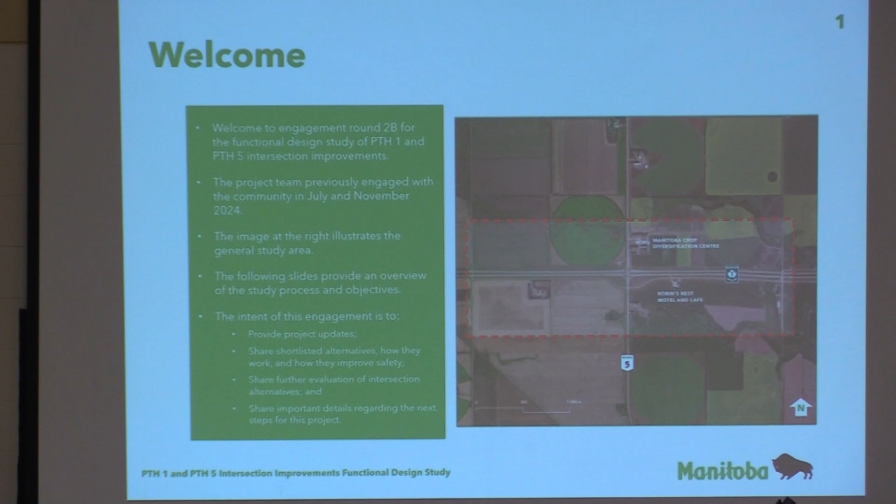Okay, that first slide just says welcome, which is everything that I mentioned already. But the bottom bullet there, the intent of this engagement is to provide project updates, to share shortlisted alternatives, as I mentioned, to share further evaluation of intersection alternatives, and then to share details of next steps. We introduce ourselves, so we'll skip this one.

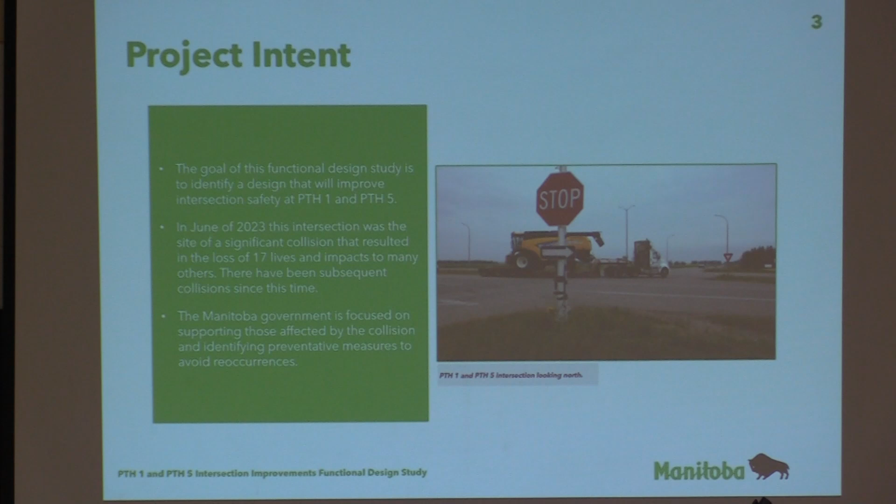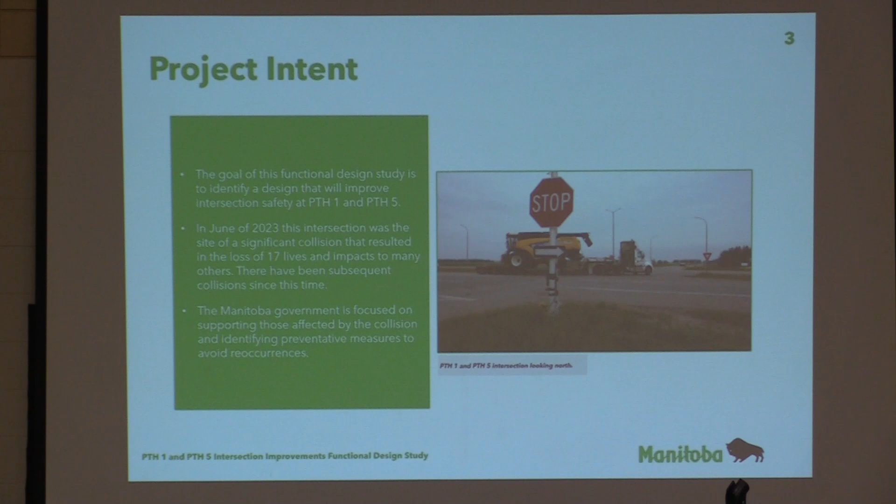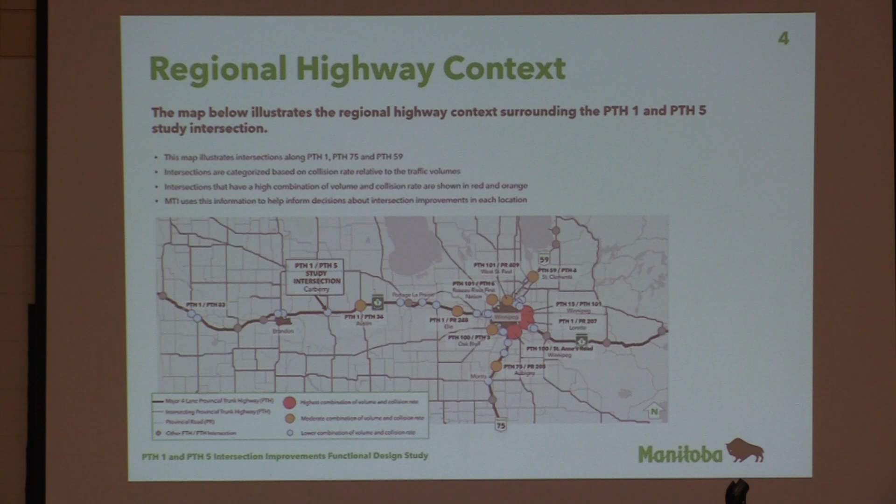This slide is helpful for understanding the location in part. So what you're seeing is southern Manitoba. It shows the PTH1 highway going from west to east or east to west across the province, and then Highway 75 as well. And what it's showing along the way is all the at-grade intersections, and the dots represent volume collision ratio. So you can see where the study section is. The largest dots represent the highest combination of volume and collision rate. The orange ones are a step down from there, and the blue ones are a step down from there, and then many of the at-grade intersections would have lower rates yet. So this isn't a commentary on how important this intersection is, just the lay of the land in terms of the PTH1 infrastructure and intersections across the province.

Round one, for those who weren't in attendance, was just to say hello - to introduce the project and receive input on what are the things that are important to people, what factors we should consider. Again, not which intersection should we do - we won't be asking for a vote about what type of intersection should be done. We need to know local things we should understand, any gaps in our understanding so we can do a better job recommending a good intersection treatment for this location.

After round one, we developed alternatives as a team. We came back - for those who weren't there in round 2A, we shared that whole range of alternatives, which we'll recap here today as well. And then we shared how we would be evaluating it.

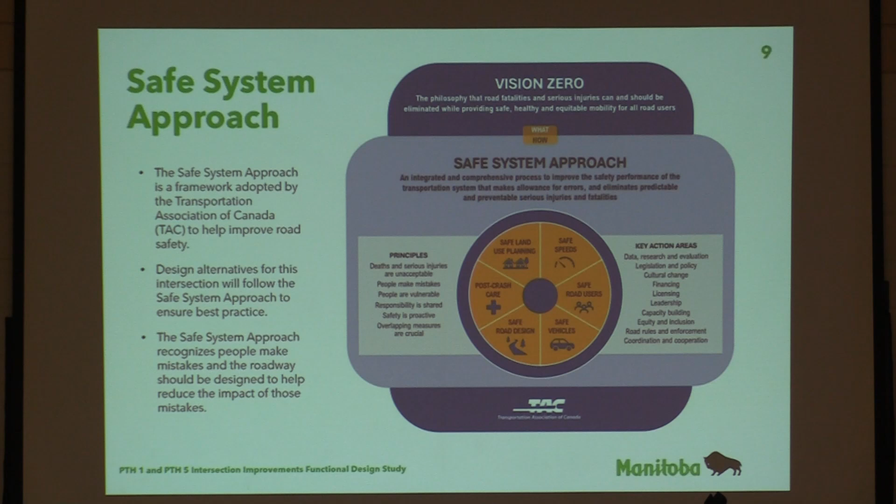Furthermore, three goals on the right: safe road designs. The goal there is designs that protect for mistakes, like I mentioned. We have to acknowledge that people make mistakes, and we try to reduce the impact of people making mistakes.

Safe speeds - the goal there is not too fast, but also not too variable, and that comes into the discussion about speed limits. Some say maybe reduce speed limits at this location, but we have to be mindful that's not always the best solution because variability is also difficult. Someone's going at one speed, someone's going at another, people aren't obeying the speed limit even if there's enforcement.

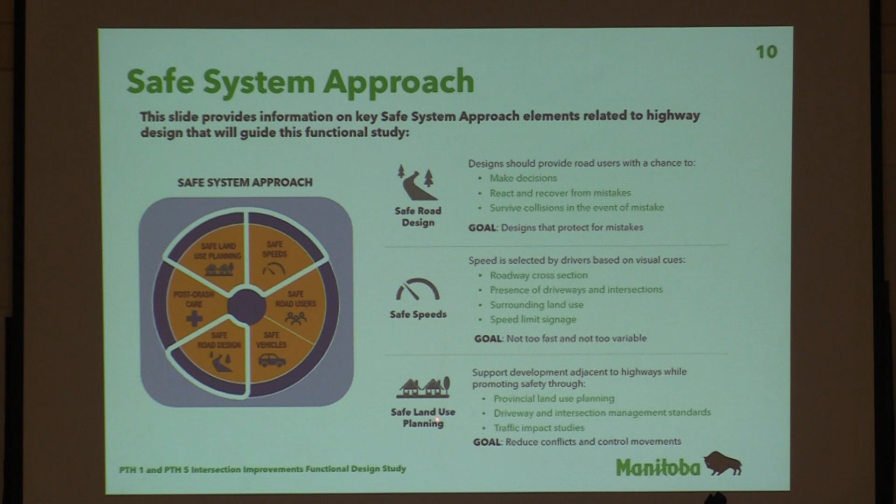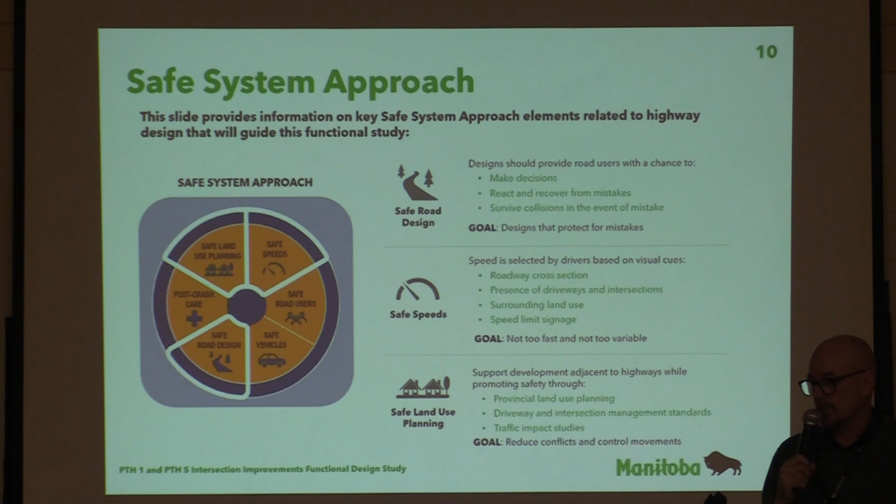So you do have a risk with having variable speeds just as much as if you lower or raise the speed limit. Safe land use planning - the goal there is to reduce conflicts and control movements. That's often about what's happening in the vicinity of the intersection, and planning that contributes to fewer negative accidents and collisions.

Especially for those who haven't been here the last couple of meetings, these might be hard to see, but this information is available on the MTI website, and you can go there and get this information. We'll give you the link, and you can zoom in and peruse it.

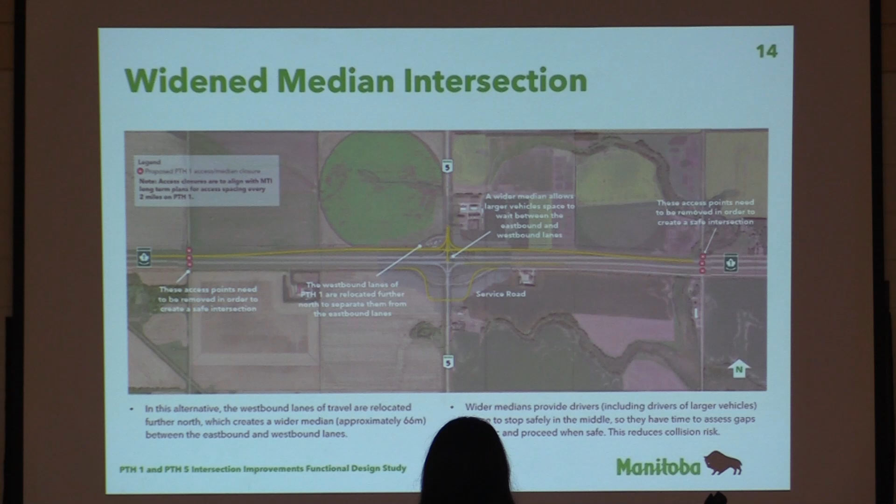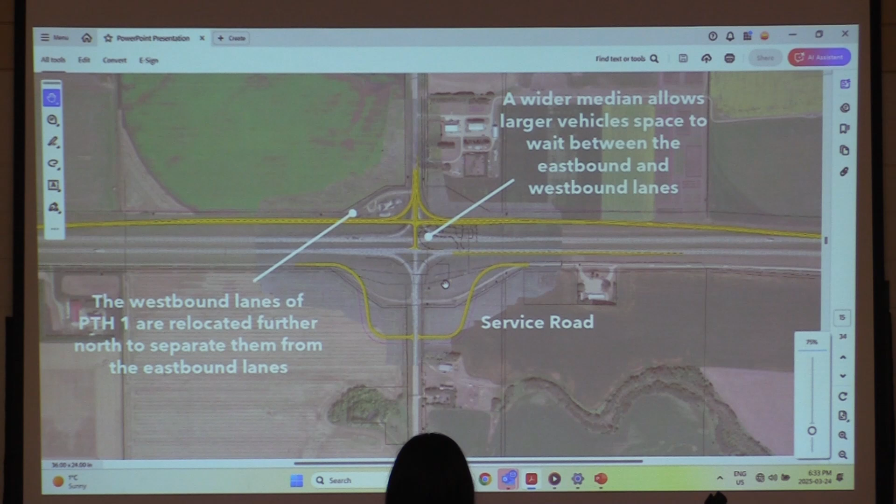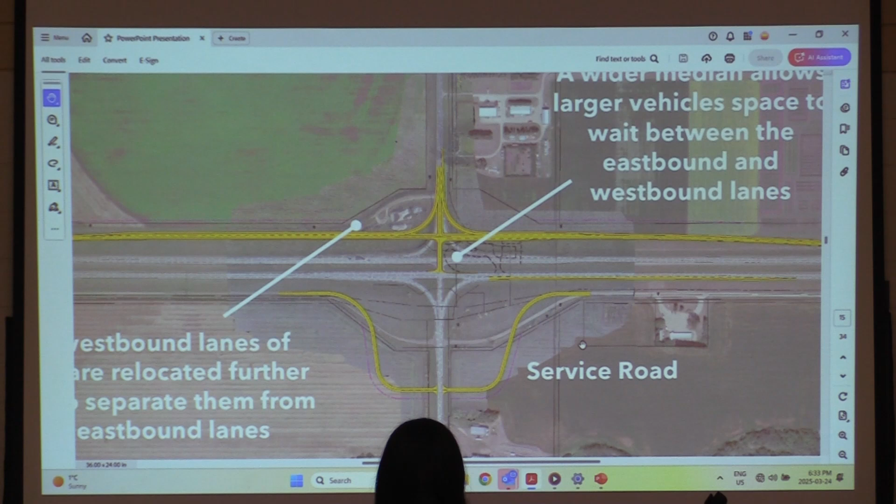With this option, the eastbound lanes stay where they are, except there's a little acceleration lane added here, so that when you're turning on PTH5, that'd be better. When you're turning off, headed north from Carberry up to PTH1, you make a right, with the acceleration lane added there. And then the westbound lanes are abandoned and instead pushed north into the fields.

What that does is it creates a widened median, hence the name widened median, between the eastbound and westbound lanes. A couple of advantages: people can feel safer when they're between the eastbound and westbound lanes, waiting across one direction or the other. Also from a driver workload perspective, currently you have to look that way and that way, and over your shoulder on the south side to make sure nobody's coming. That workload is high, and this divides it, basically cuts it in half. It means you can make one choice, proceed through, make another choice, and it reduces the chance that any driver would make an error there.

The yellow at the bottom is the service road. Every one of the shortlisted options shows that service road being adjusted - you can see it in the aerial photo. It will be pushed further south, and that creates a separation distance. For those familiar with these movements, if you're on PTH1 coming into Carberry and turn right or south, immediately upon you is that service road intersection, very, very close. We see lots of close calls and collisions because of that proximity, so this would help by pushing it further south. Of course, speaking with the landowners and homeowners nearby about the impacts to them, every proposal shows this service road adjustment.

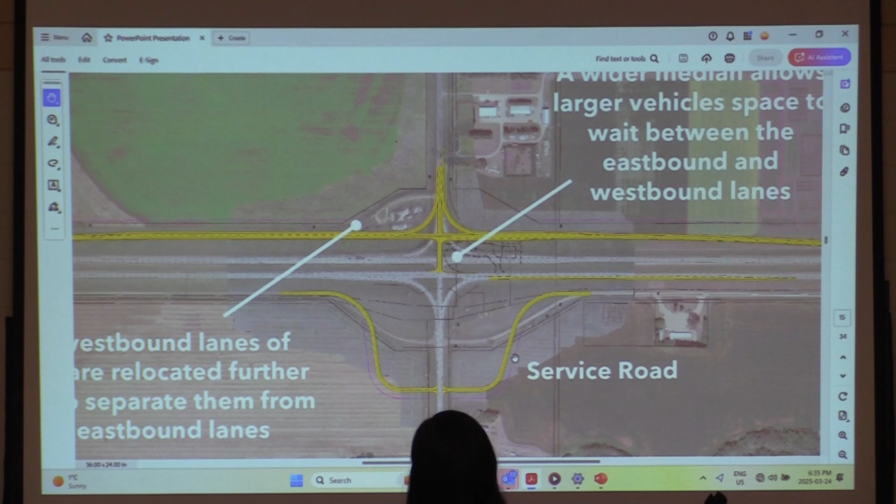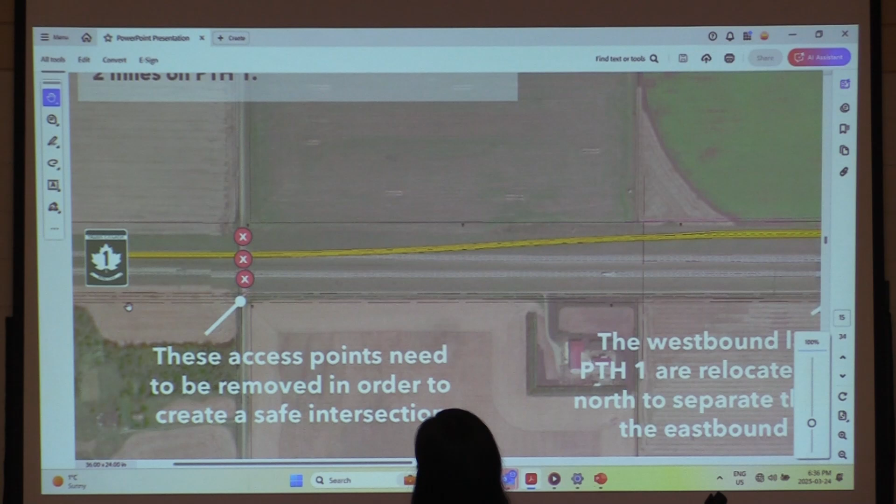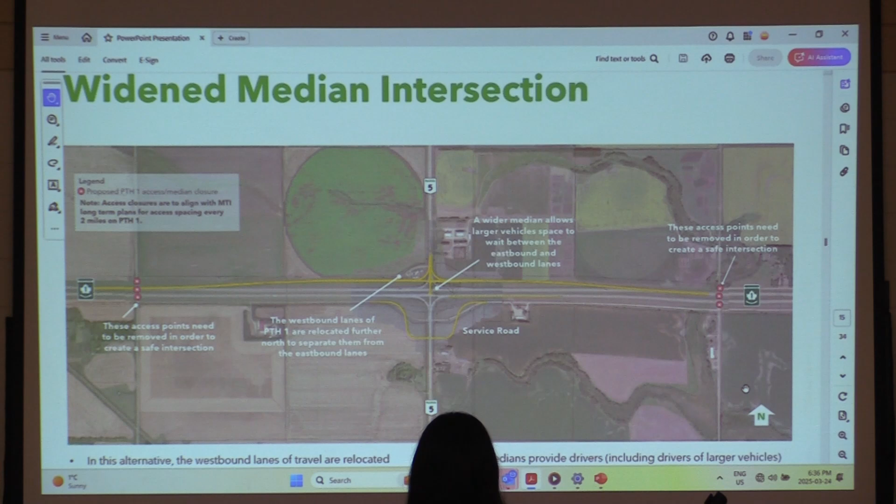Furthermore, all of them show those three X's to the west and to the east, which I mentioned earlier. In an ideal situation, from a PTH1 safety perspective, the idea is if you create a safer intersection, you try to get people to go through that one rather than one that's not safe. That said, clearly in this area - this goes to the point that every intersection and every area is different - the movement of farm vehicles and agricultural operations will be quite impacted by that. So we have to look further at whether that can actually be done, either the east or the west. But all three, so that we're transparent, show that. We would not be transparent if we weren't showing that and letting you know we have to look at it. From an ideal safety and engineering point of view, you'd go with those, but in a local situation, realizing the impact, we have to think about how that can be resolved and whether it can be done or not.

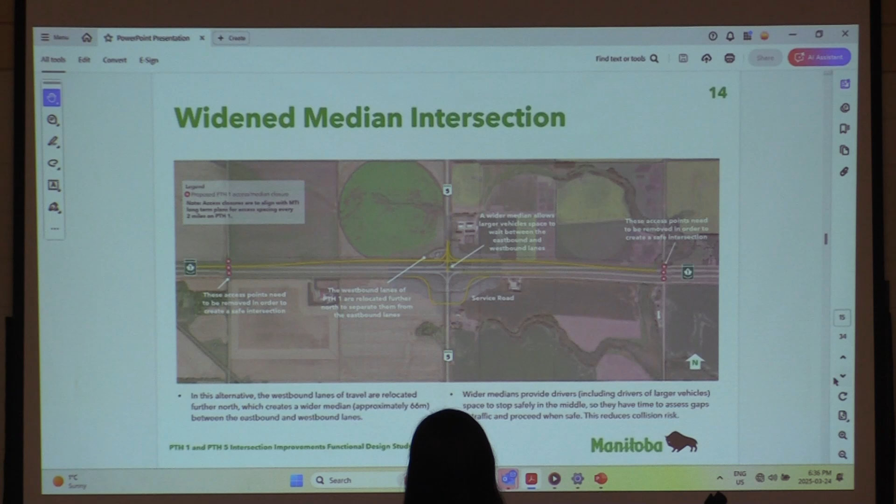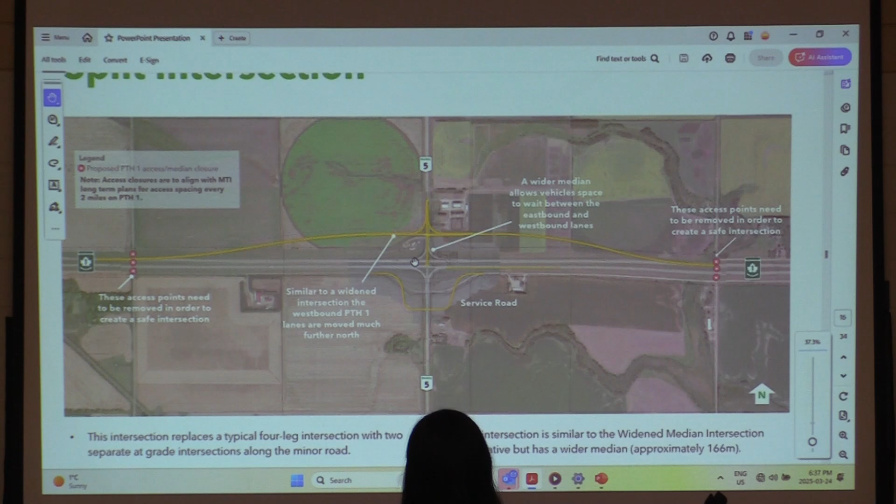Next one is a split intersection. This is very, very similar - it may look very similar to the widened median we just looked at. It's basically the same idea, except that you push the westbound lanes further north. What you actually get is not just a wide median, but they call it split because they're so far apart that, again, driver workload is reduced by allowing the driver to look in one direction at one time to cross PTH1 and PTH5.

Also you get a bigger refuge between the eastbound and westbound lanes for several vehicles parking there rather than just one car, so it really is an advantage in that respect. Of course, a major disadvantage would be the use of agricultural land and the acquisition of land, which can be very disruptive. Remember the chart about 15 to 20 other things to consider, whether they're better or worse than any of the other options.

So again, I just encourage people—I know when you look at an option, and I do it too, you say right away, I hate that one, or I hate that one. Really try to be as level-headed and objective as you can about the relative advantages and disadvantages of each one. We don't have the luxury of just telling the decision maker, just do this one because we think it's better. We have to go through all of them open-mindedly, and I encourage everyone to join us in that effort.

My impression was that when you're headed north on Highway 5 and you're going to cross the Trans-Canada, say I want to go to Winnipeg, I'd have to take that service road to get back out on the highway. No, you're going to go to the stop sign just as it is now and use that merging lane to go east. So not the stop sign, you merge. With the addition of this acceleration lane, you have a protected lane to speed up in, so that part's not changing. The service road then is just for Robin's Nest. Okay, that clarifies it, thanks.

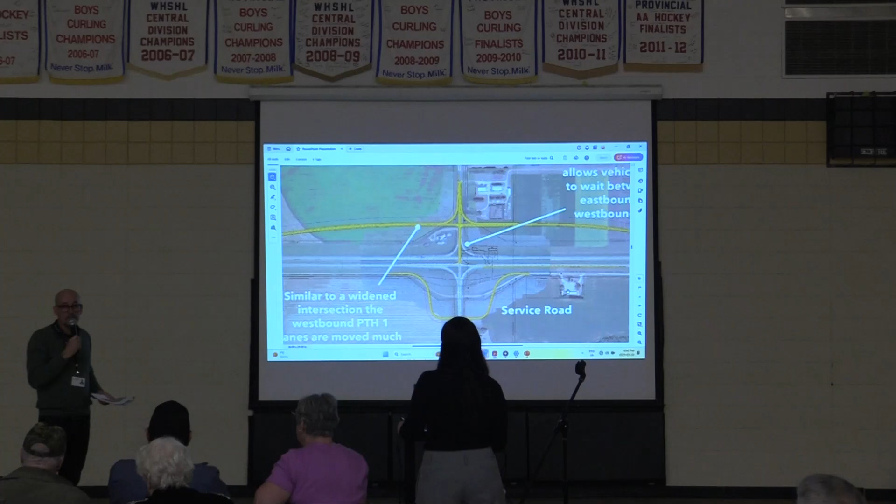Yes sir, how's the actual reason why we're all here—any of these, I know you can't compare, will it reduce what actually happens if we're still coming to a stop line meeting traffic that's going across? So you probably can hear the question: do any of these, based on your analysis of collisions, will it actually make it safer? And it will, and I've got some info to help describe that. But I encourage everyone to keep an open mind. This is an opportunity to see the information, judge for yourself, but let's wait till you see the information.

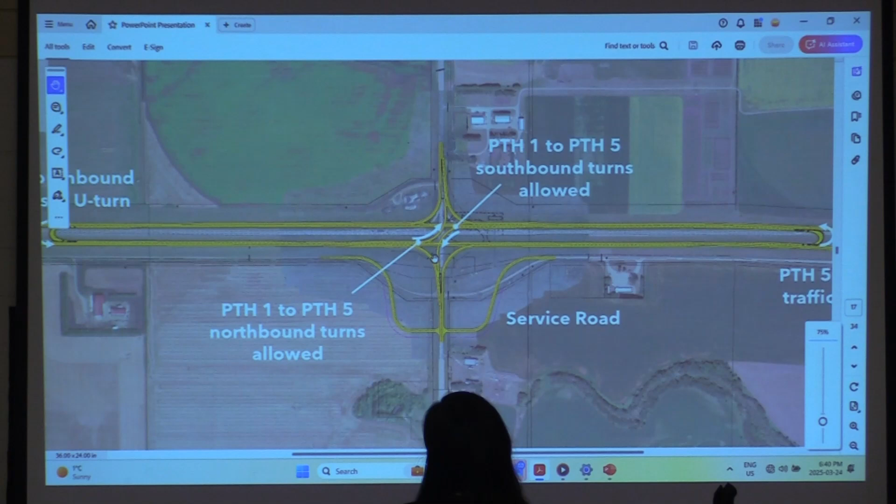Okay, the R-cut, for the reduced conflict U-turn—yes, it's new, and we'll take some time because, I'll just say this now in the presentation, there's a fair bit of additional information on the R-cut because it's new, and we need to explain it so that it gets a fair shake in the evaluation. So it may look like we're picking the R-cut, but we have not selected a preferred alternative—it's just the extra information so that everyone can understand. And I'll tell you, when we work on these projects, and we've got some members of the project team here, all of the project team has advice on what they think should be done. And for sure, there's some who feel that R-cut is appropriate, but we're not in a position to say that's the preferred alternative.

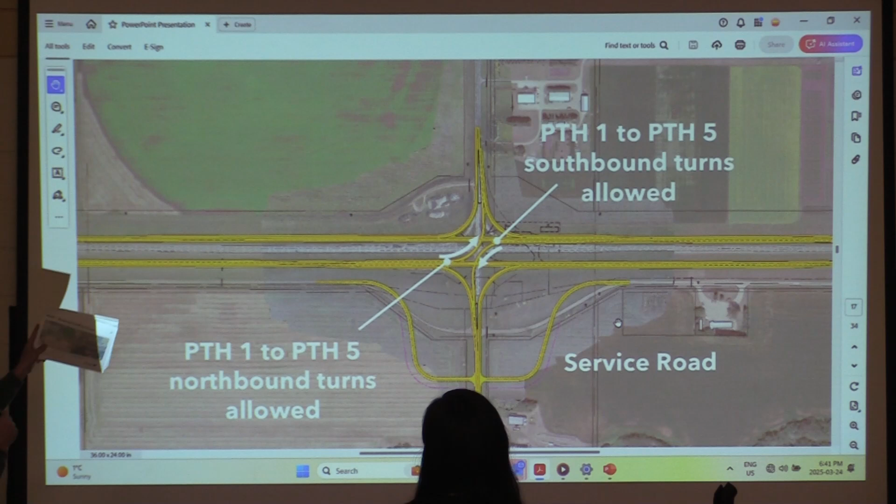So the way it works first, the big thing is considering what you can do on PTH1 versus what you can do on PTH5. If you're on Highway 1 going east to west, you get free movement—remember, that was one of the things, you want to have free movement on PTH1, so you do in this area. You also have the ability to turn off PTH1: if you're going eastbound, you can turn northbound—that's what that first arrow is. If you're going westbound, you can go southbound. So you have freedom of movement on and off.

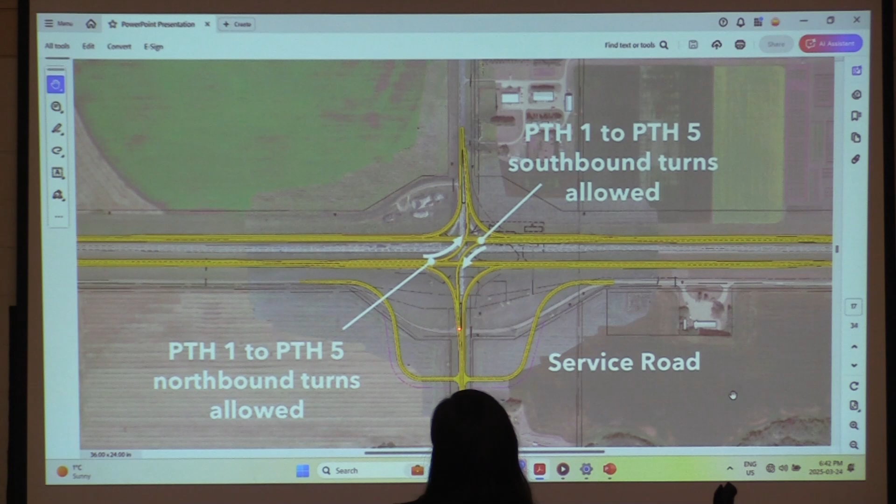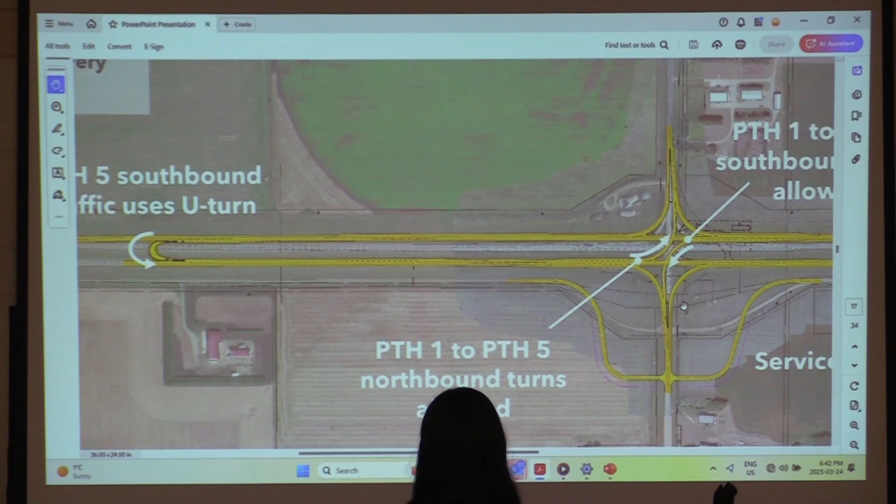What's substantially different, and maybe obvious to you, is if you're on PTH5 and you want to go straight through—again, the nature of this design in many instances is that movement going straight through, you can't. So what the R-cut does to make things safer: if you're going on PTH5 to the south and you want to continue to the north, you need to merge onto PTH1, and it goes off the drawing here, but some distance away you do a U-turn, and then you come back and can continue to Brandon or north on PTH5. The same is true if you're coming south—you go to the U-turn to the west, then come back and turn to Carberry. We've got some data on travel times and how much extra time each of these intersections will take, or how much quicker a lot of the movements actually are, for each of those options, and we'll share that in a moment. So that's how it works.

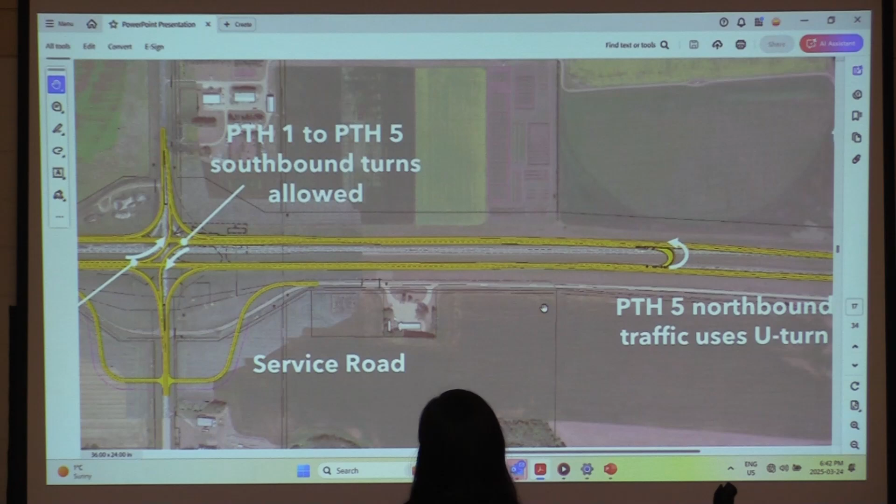You can see the service road again, the median closures again, subject to the things I said—like I said, third or fourth time, but we do need to have a closer look at those median closures that are shown.

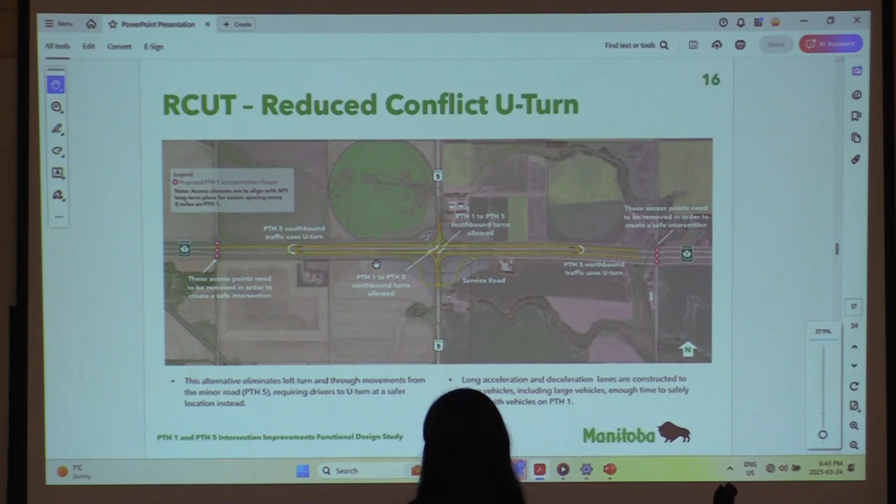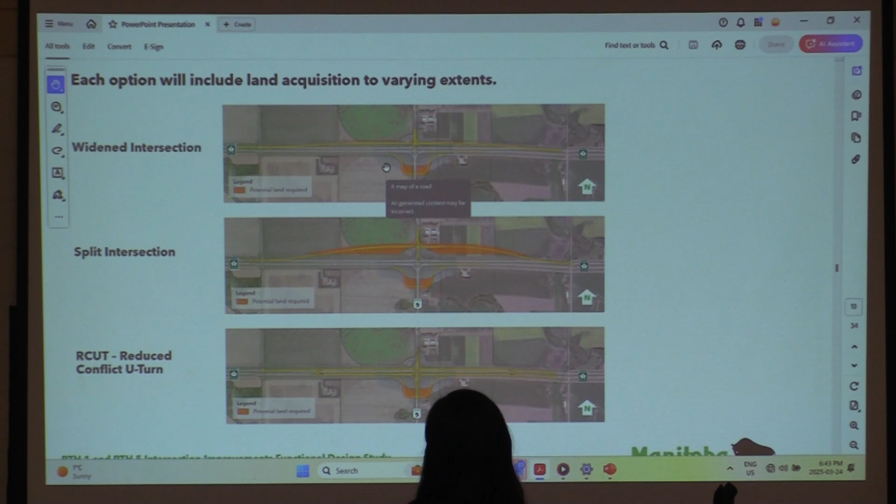Clearly, what are all the locations? You can see on the service road in every case two blotches of orange that need to be acquired in order to do those service roads. In the first case, this is the widening, two slivers of land on the east side and the west side of PTH5, north of PTH1.

In terms of the split, this of course has the biggest impact on property. If this were the one chosen, it would require all that land in order to accommodate the split. The other option has the same service road as noted already, plus a very small sliver of land on the north side, so small it's measured in meters.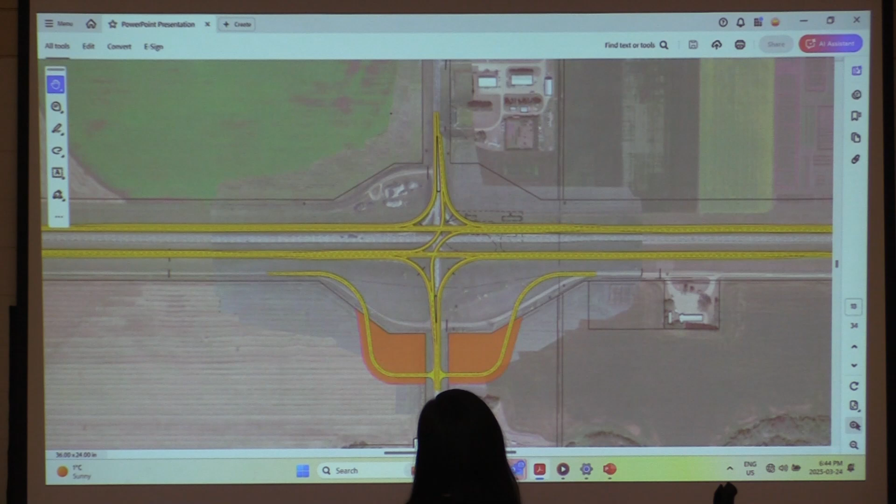Okay, to the question of safety. There's a few slides on safety. That slide shows the gentleman's question about whether B-trains can fit in while making that turn. This slide shows some B-trains and how that would have to be designed in order to make it work. But we can talk about that.

Okay, conflict points. Conflict points are important for understanding safety. It's one of the ways of understanding safety for intersection analysis. In that first bullet, we indicate the study reviews numerous kinds of conflicts. These include three kinds: merging conflicts, diverging conflicts, and crossing conflicts. Each of those predicts different injury rates depending on the type of conflict, so not every conflict is the same.

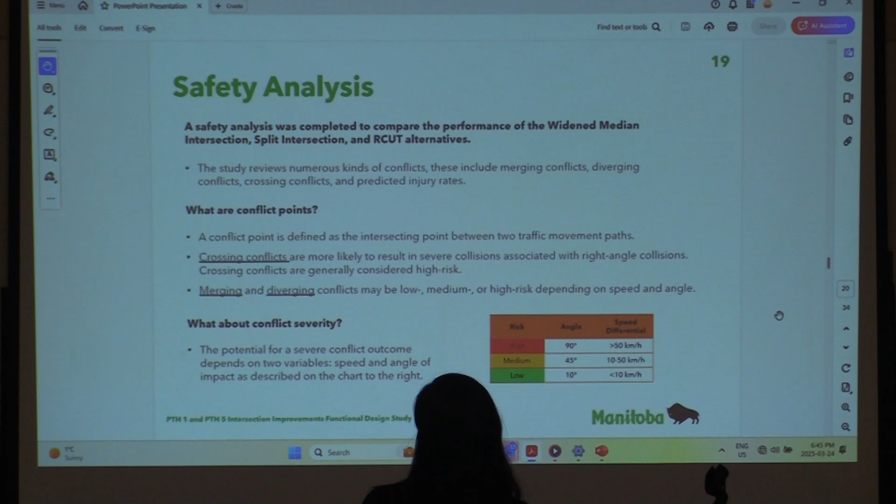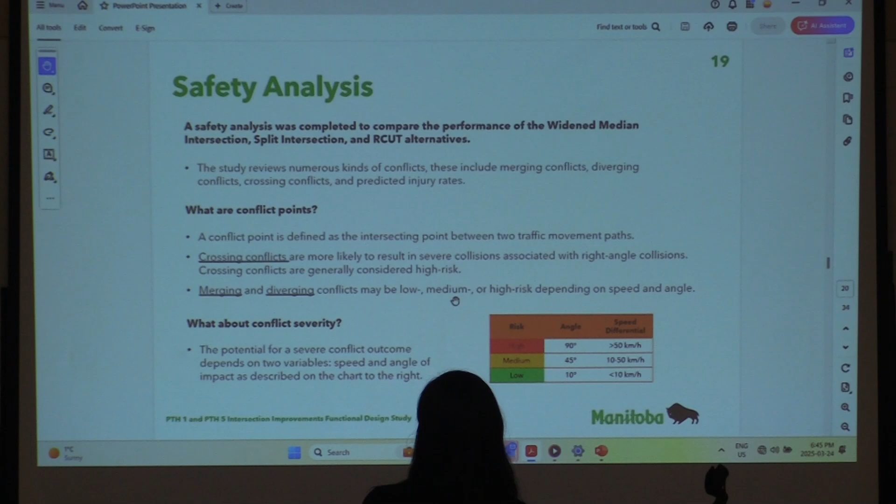For crossing conflicts, these are more likely to result in severe collisions associated with right angles. A right-angle collision is the most severe type other than a head-on collision, so those are considered high risk. Merging and diverging conflicts could be low, medium, or high risk depending on speed and angle. That's the chart at the bottom right. High risk is a 90-degree angle collision with high speed differential greater than 50 km/h. Medium is a 45-degree collision, 10 to 50 km/h. Low is 10 degrees at less than 10 km/h.

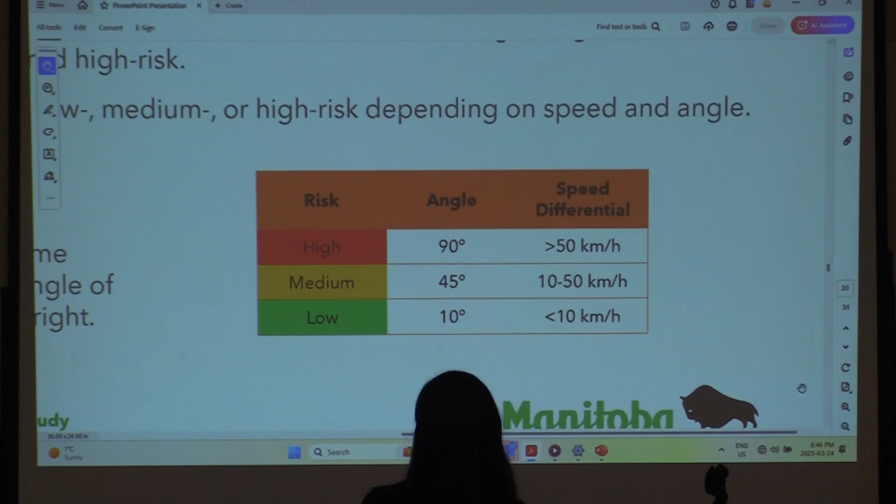So that's one piece of understanding safety, which is explained in the graphic on the next slide. These are very important slides. Afterwards, we're going to put the options up on the tables at the back. If you want to stick around and talk to us, we'll have some of these slides on safety there as well.

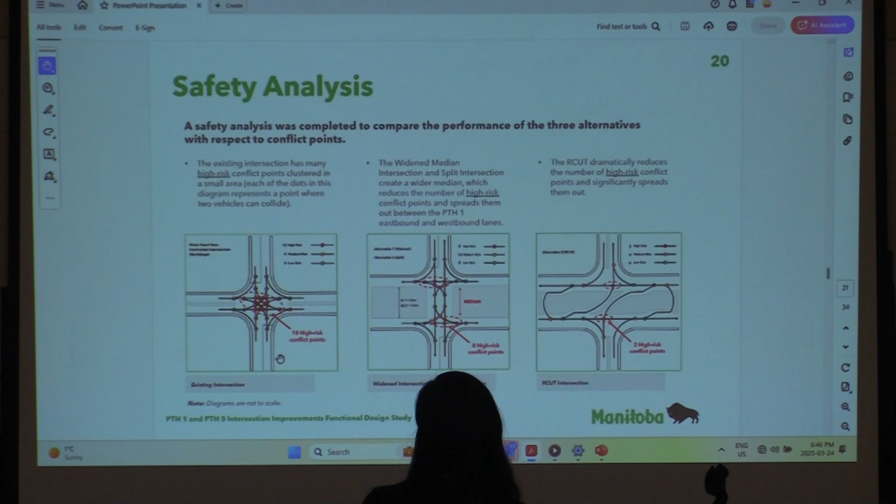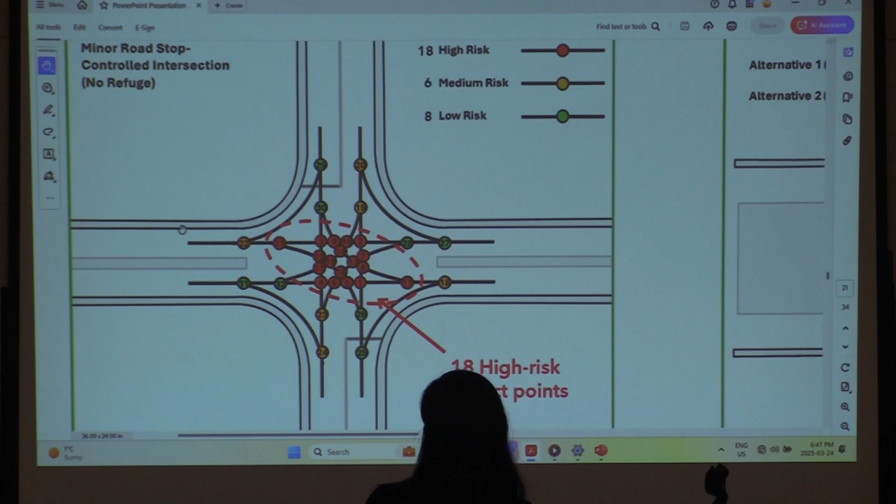On the left here, that's the existing intersection, a typical 90-degree cross intersection. This is just the geometry, so you can see the lines, one for every car movement. If you imagine going in any direction and making a turn, all those options are shown. Every time a line crosses another line, it's a potential conflict. So these are just geometry.

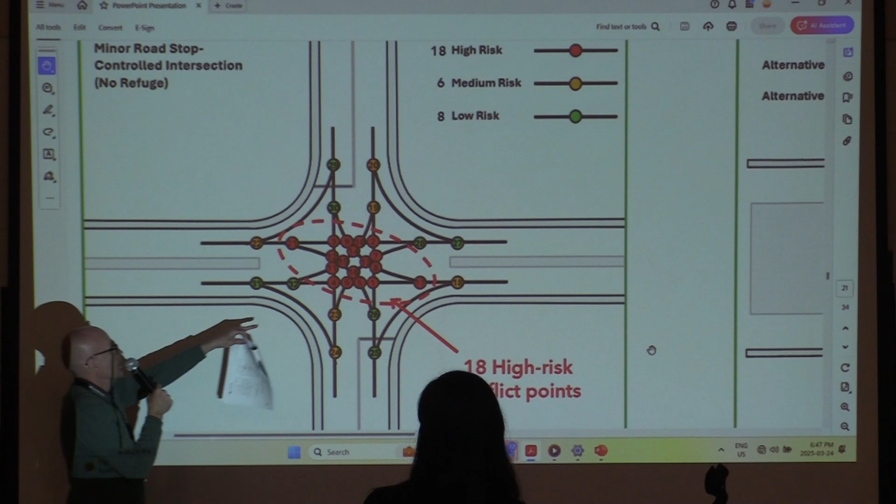These are all conflict points: green, yellow, and red. The red ones are the high-risk ones, where the angle and speed combine. In the current situation, there are 18 high-risk conflict points: 16 of them are the 90-degree type, and 2 are the merging/diverging type. Did I say that right? Yeah, thank you—not the engineer, just the one explaining it.

Yes, sir, go ahead. You talk about all these things, but you don't talk about lights—the same kind of light sensor that you have on 16 and 1. It's worked for years and years. Why can't it work on 5 and 1? Okay, so we did talk about signals at some point, and the disadvantages. I'm going to go through the presentation and we can talk about why signals weren't shortlisted. I just want to know why—it doesn't deal with safety, why that's needed.

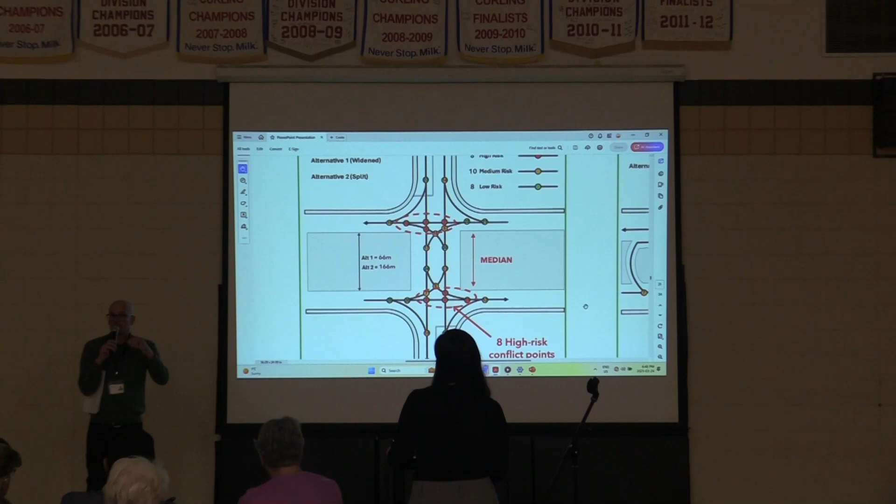Okay, the next one actually represents both the widen and the split. They're essentially the same configuration, just remember the split is further. They both create a wide median, but you have the same patterns, so this graph suits both the wide and the split.

You can see what's happened is the number of high-risk conflict points has been reduced to 4 here and 4 here, so from 18 to 8. So it is effective in safety, just starting there from a logic point of view and an analysis point of view. If you were asked how are you going to manage safety, how are you going to characterize safety?

You start looking in terms of those conflict points, reducing those conflict points, and reducing driver probabilities. Many ways to make something safer, as opposed to speculation about whether we think something is safer. We have to analyze it and prove it.

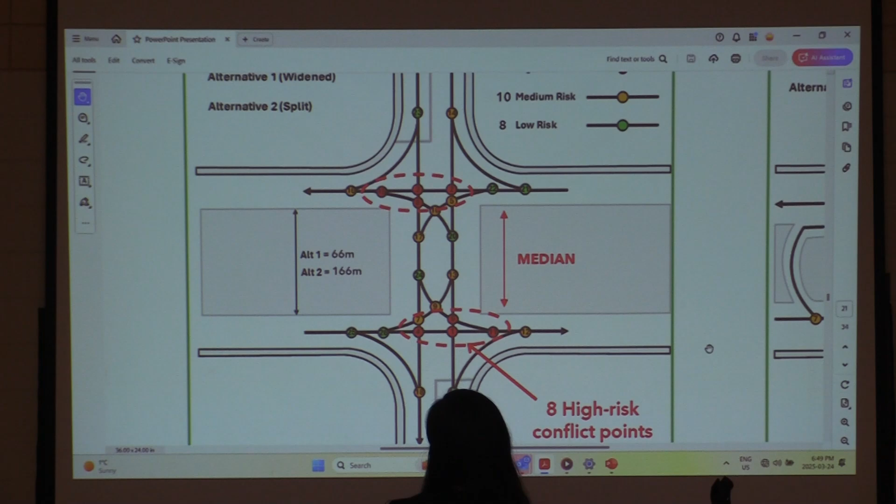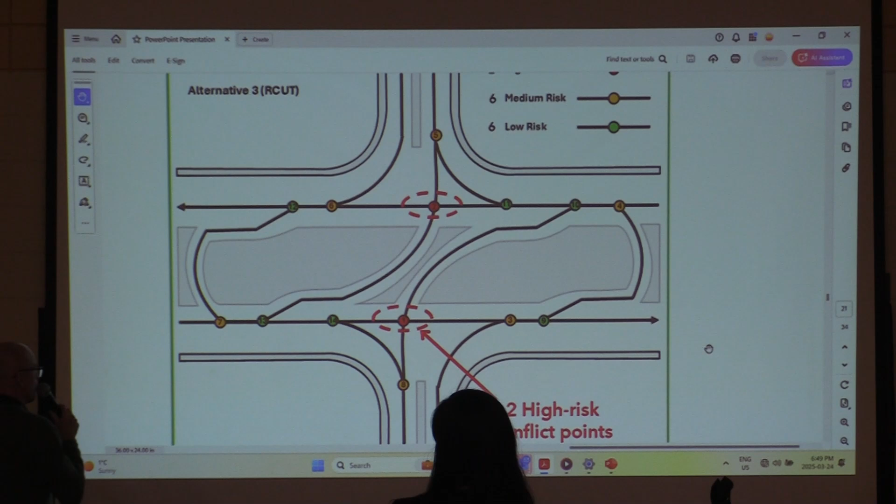Last one is the RCUT, and from a safety evaluation perspective, it outperforms the other two quite substantially. And again, just the geometry here, it wasn't magic. It reduces the high risk conflict points to just 2, and that's why it's seen as safer than the other two, where it channelizes the driver's movements, reduces the driver's workload thereby, and also creates only one high risk conflict.

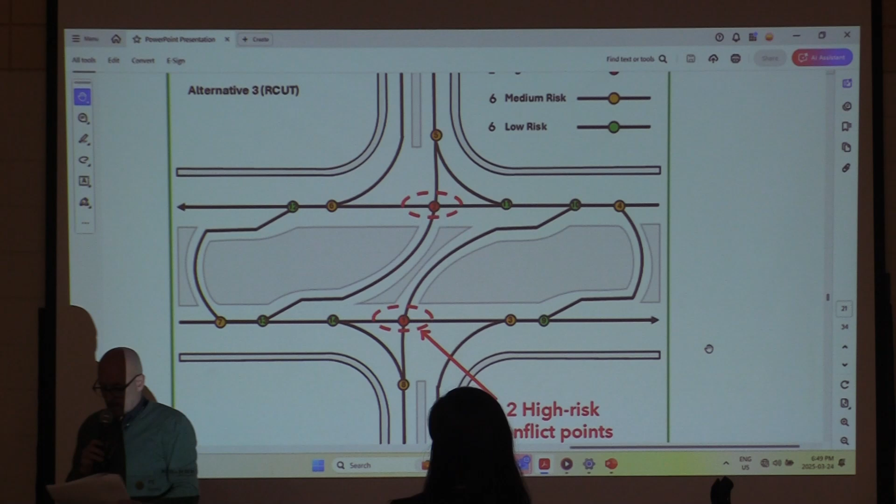So if you went to RCUT, well then how is the speed going to reduce? Is it going to be 100 or 110? So speed limits, there you want to talk about speed limits. The question was, in any of these options, would the study be recommending any speed limit changes? Is it possible there's recommended speed limit changes?

So certainly, as you can imagine, speed is a major factor in any kind of incident or collision. And of course, a lot of people logically think reducing speed makes things safer. However, as drivers, as yourselves, everybody likely drives here in the room, as you drive in certain situations, you tend to have a feel for how the road operates and how it feels for you. If you feel safe going a certain speed, or if you feel more confined, you don't feel as safe, so you tend to slow down.

So the way highways operate in Manitoba for the most part is they're wide open, there's not a lot of visual cues for why a person would need to slow down and that sort of thing. So drivers tend to drive to an operating speed that feels safe to them, and the speed limits are set based upon design standards and that operating speed that drivers tend to operate.

So it's a little bit of an art and a little bit of a science, because if you do look at any of these options, you know, if you put up an 80, you'll have some people that will 100% obey the law-abiding citizens, but you will certainly have individuals that will not abide by that. So you can have a speed differential of between 80 and 110, 120. So now you've got a 40 kilometer an hour speed differential.

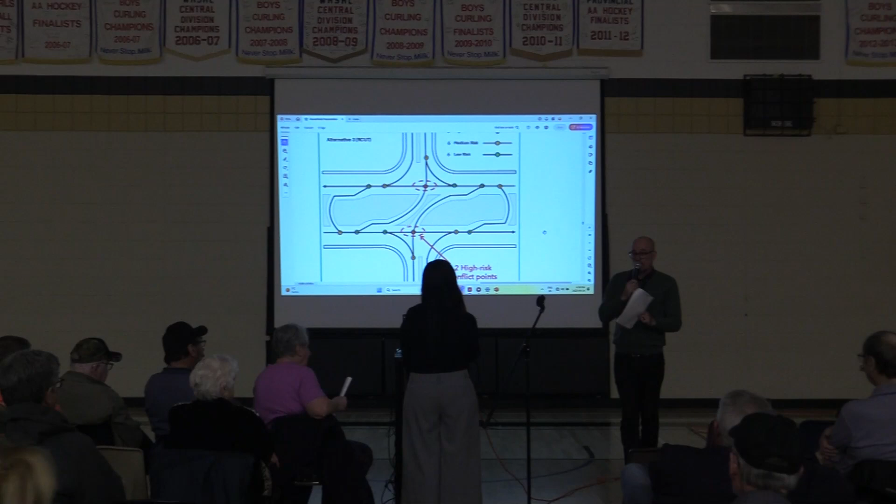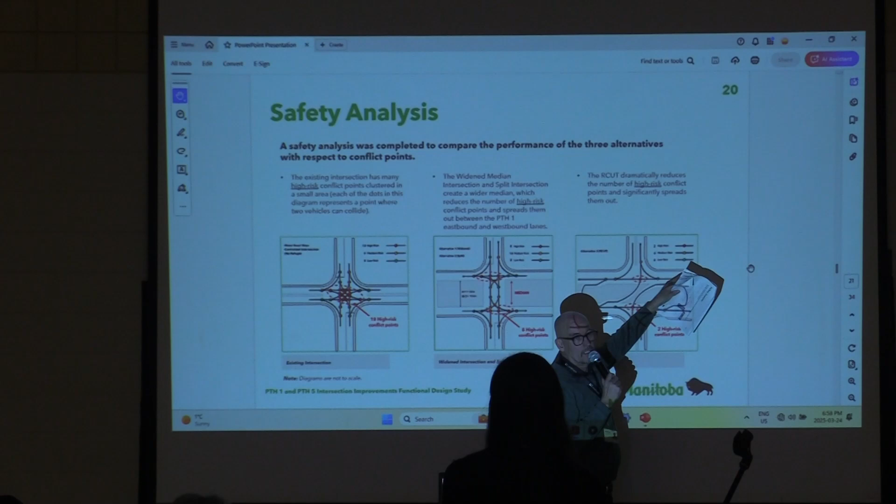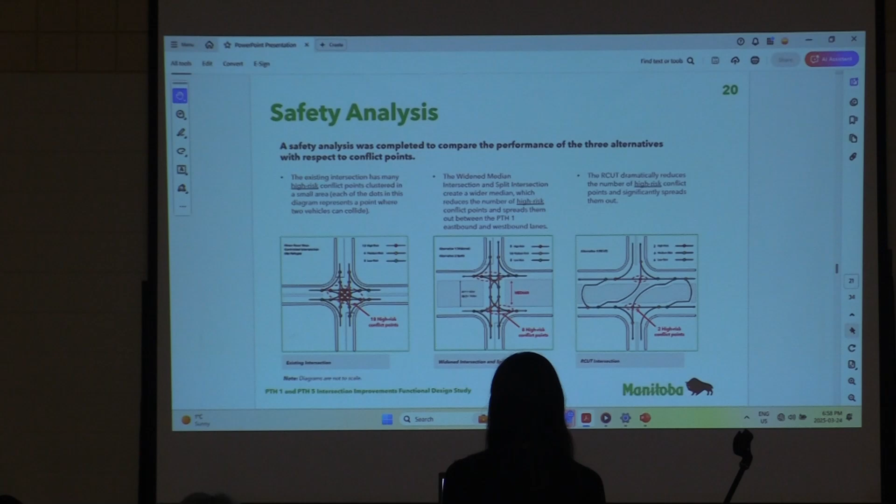Question, sorry. For the numbers, then wouldn't you add another 12? Because you're shoulder checking and merging essentially 6 times per lane. So Diana, would you add like 6? Not 12, so you merge once, but if you're doing it with... Yeah, I got it, 6 green ones, would you? Yellow.

So the gentleman's asking, and it's a great question, thank you. Because of that merging situation with the RCUT, especially if you're going off to go to PTH 5, you might merge all the way over. In one direction you have to merge across 3 lanes, and then in the other direction the same thing. So he's asking, would you add dots to the count of potential conflict points because you have to make those movements?

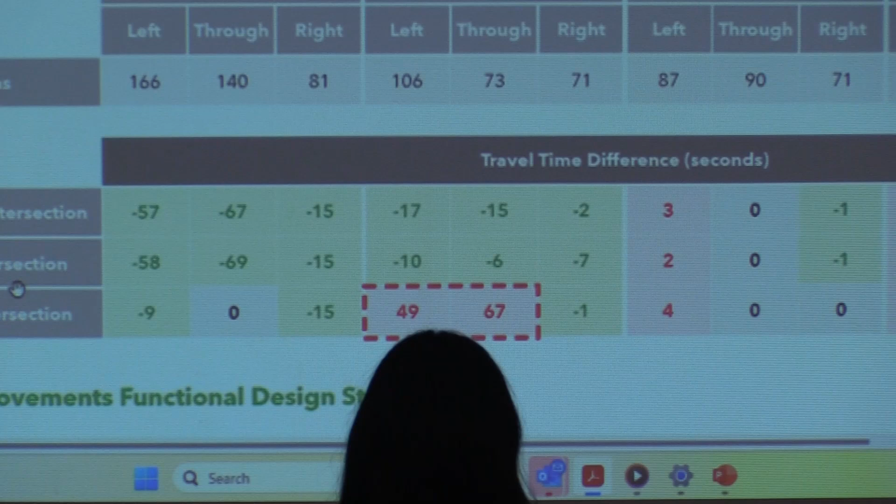So this is showing that in the case of the RCUT, for the northbound direction, considering the travel times in the existing condition and existing intersection configuration, they result in just slight decreases, or more or less the same time to travel through the intersection, whether the northbound lane is left or through.

But in the southbound direction, because it's basically not as busy as the northbound direction, the travel times are lower certainly, and when you look at the RCUT and have to go through U-turns, you see an increase there. I hope that explains that.

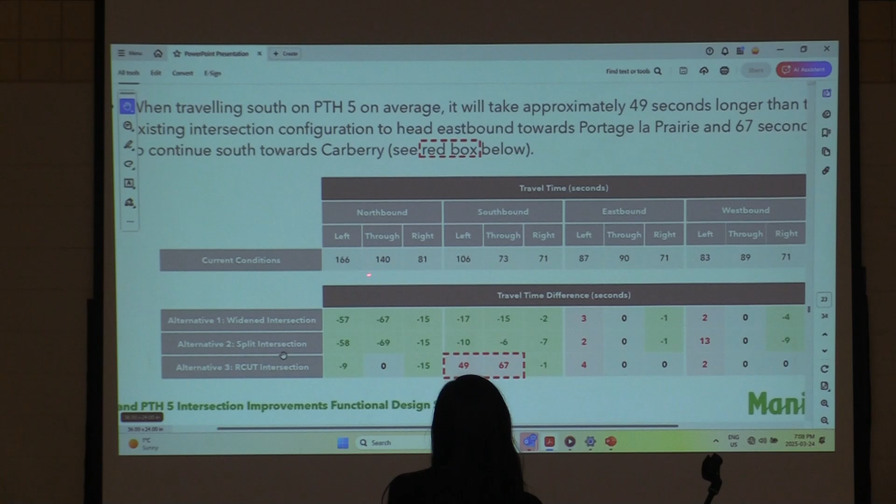Okay, yeah, I don't understand how it can be zero for northbound through, when you have to merge onto northbound. So northbound through here for the RCUT, why there's no difference, is because of waiting time, you don't have to wait. It is interesting, well, you do have to merge on, which is different than waiting, so you merge and also wait for the stop sign.

When you yield, often you just get to keep going. You have to slow, but you don't stop. Whereas a full stop sign or crosswalk, you have to stop. So the logic holds there.

Go ahead. I noticed you got all these wait times and everything else. Are you talking about wintertime? Is this the wait times on average throughout the year, or a particular season? Can you just tell me? It's looking at the peak hour, and it's typical through the years.

So would it depend on the conditions of the road? Yeah, like, you know, when you do an average, right? Yes, of course, you're right. Conditions would mean you go slower for sure, and not in all intersections obviously. Yeah.

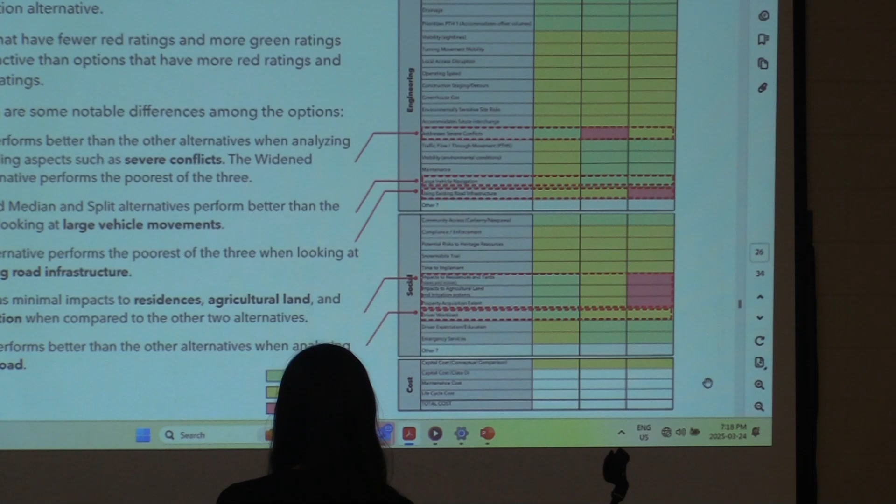Okay, and then at the bottom, costs - they're going to be comparable. Comparable means typically within a contingency. So if you have a contract, there's always a contingency, and it's 10 to 30%. The cost is within that amount, and they're comparable because of that contingency - so they're not taking your 100 million down to 3 million, somewhere in between. And that's how we think about it.

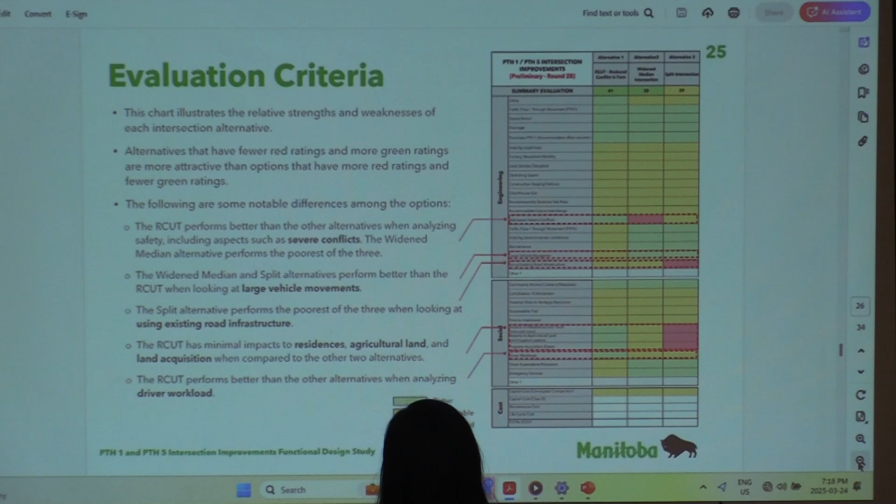So as I said, we don't have the luxury of picking on one factor. We have to look at all the factors, particularly safety, and everything else is important as well. In the end, we want to pick the one that has the least disadvantages and the most advantages, in particular the critical ones.

Okay, I mentioned this before and I'll mention it again - the RCUT is not selected. Even when we look at it, some of us want to pick the RCUT, and some don't. So we are trying to remain objective about which one to pick. Since it's new, we want to provide some extra material here to help explain it, which also helps explain the widening and split intersection.

It's a great province, it's winter - our neighbors in Saskatchewan deal with a similar situation to Manitoba. So this is one that exists in Saskatchewan. These are actual photos.

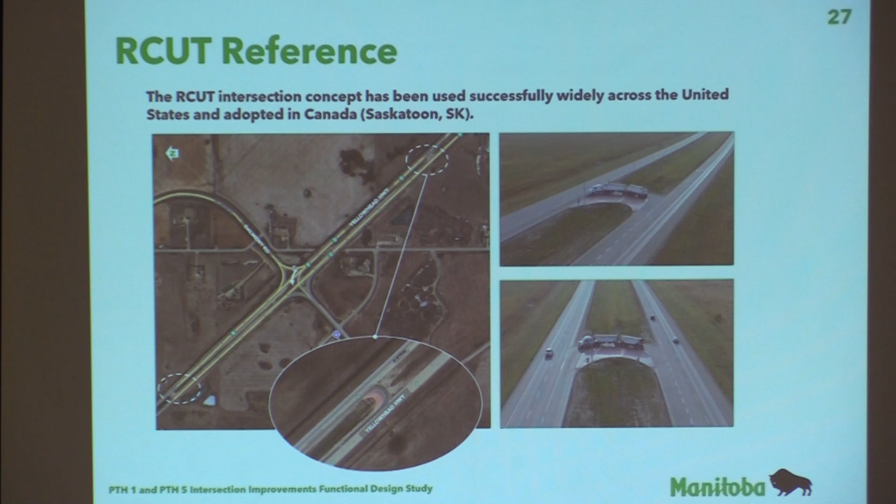So we're not going to rely solely on this option. Keep in mind, even if you don't like the option, it is an option.

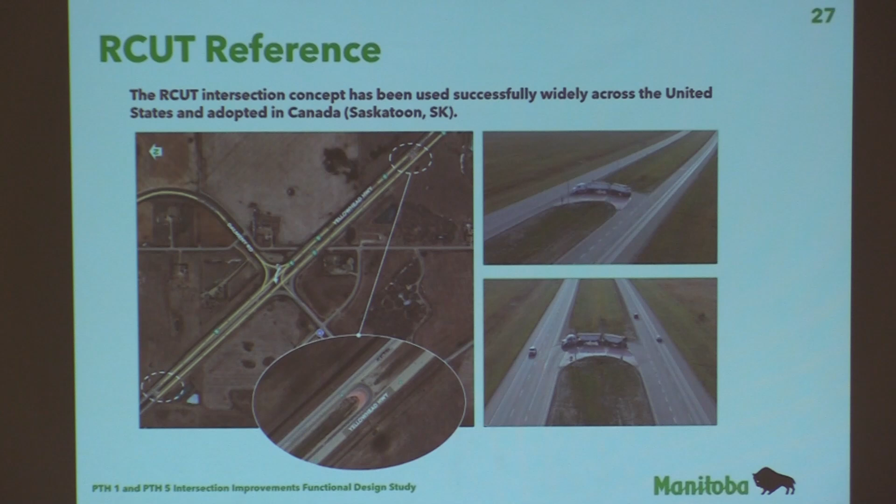There were, oh yeah, okay, if you're in... great. Whereabouts is that, Larry? Whereabouts is this?

It's just west of Saskatoon on Highway 16, Yellowhead. When they implemented it, they designed it based on a 110 design speed for posted 100. But under abundance of caution, they've posted it at 80 to 100, and they're evaluating it while it operates, then deciding whether to maintain that or raise it.

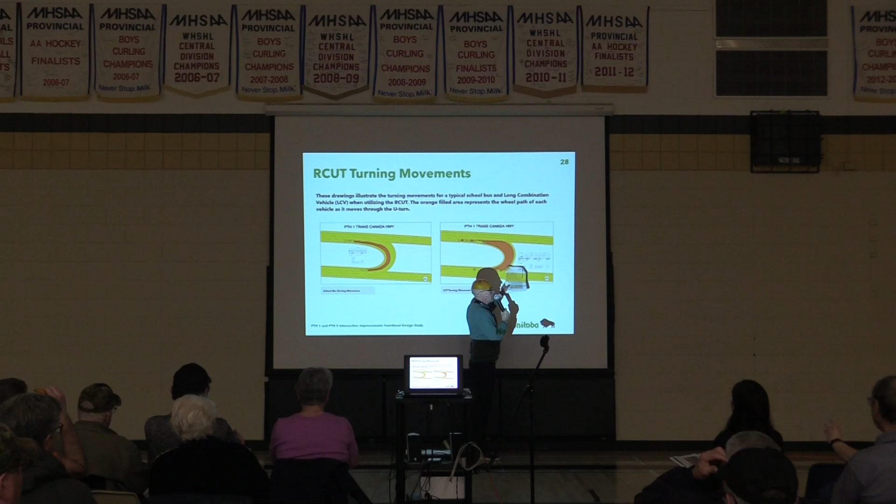This is software, which you see the reality version in Saskatoon. This is the normal software called AutoTURN. You put the trailer in there, and it shows you the orange is the wheel path, showing the outer extent of all wheels in its totality. So it's designed to make it work, even with the longer trailer.

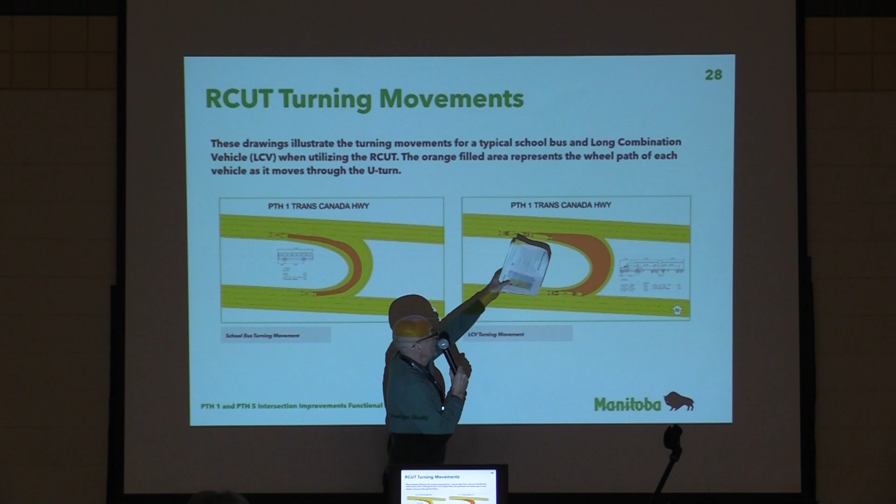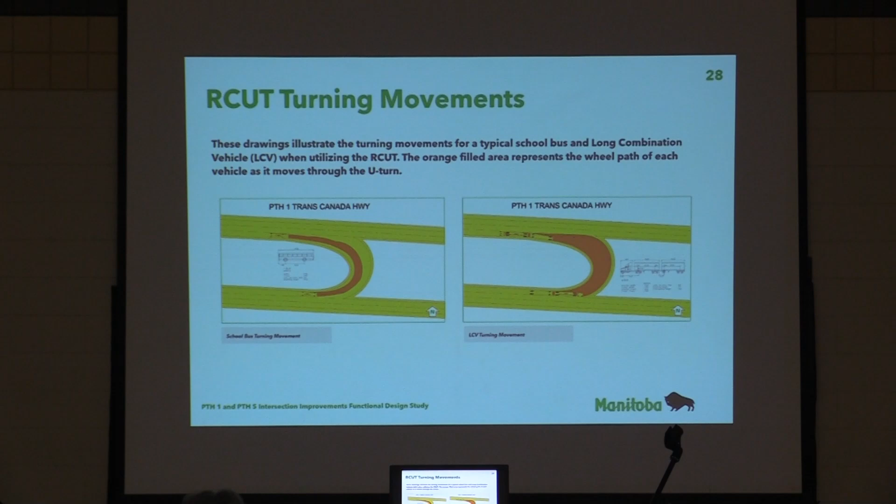I'll show you a video. No, that's the protected lane. Because there's not enough room for me to get in behind him, so I'm stopped on the Trans-Canada. That would be the deceleration lane, so that's not a through lane there, that's the deceleration lane. So at that point, the Trans-Canada is 3 lanes wide: there are 2 through lanes and a deceleration lane to do the U-turn.

See this white wheel path, that's a lane. That's a lane, and that's a deceleration. Well, the video shows this. Those intersections, is there really... like there's a lot of truck traffic on 5. Other intersections might not have as much truck traffic. Is that? I mean, yeah, like number 1 here and number 5, both of them have truck traffic?

Yes, we have done traffic counts and looked at the truck volumes, particularly size of the trucks, and also the acceleration rates of the trucks when doing the traffic analysis.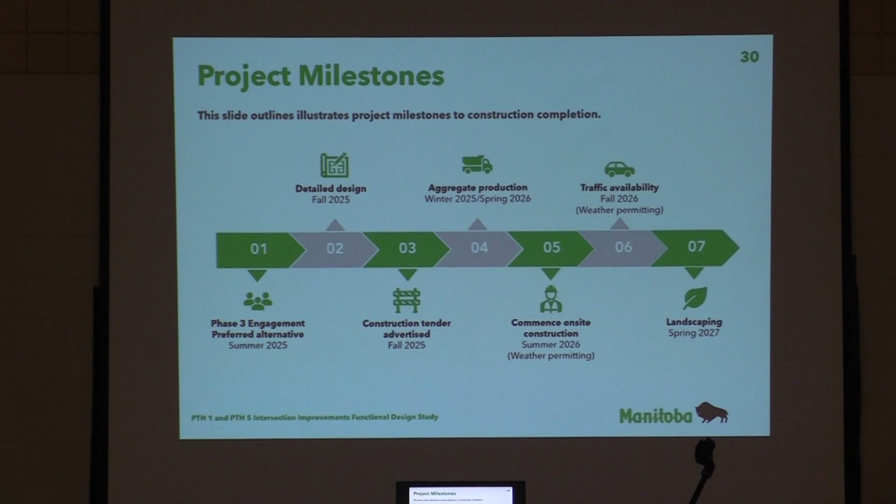This one starts where the other one left off, and it's horizontal instead of vertical. Pre-summer 2025, maybe June, we haven't scheduled it yet, but we will let everybody know when we're ready for that. Phase 3, preferred alternative, followed by detailed design in fall.

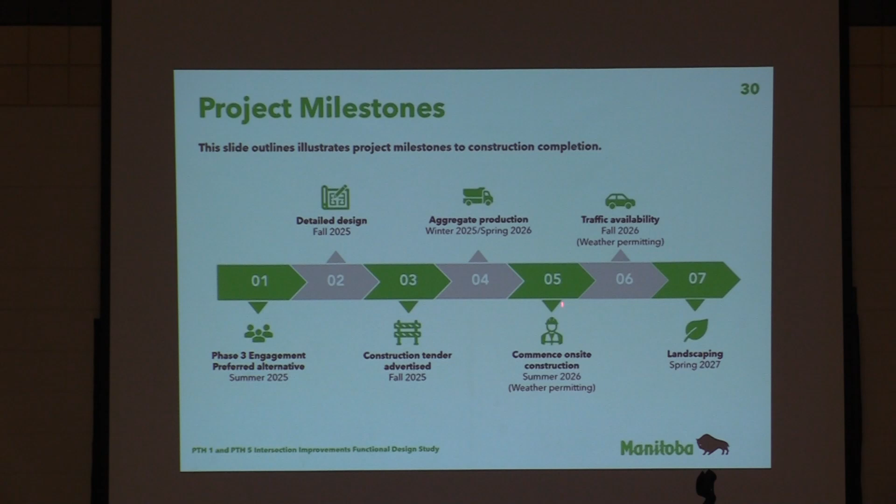Number 3, construction tender advertised for the aggregate production in the winter of 2025 and spring of 2026. Then commence on-site construction summer of 2026, weather permitting, then traffic availability to use the facility in the fall after the summer construction and landscaping.

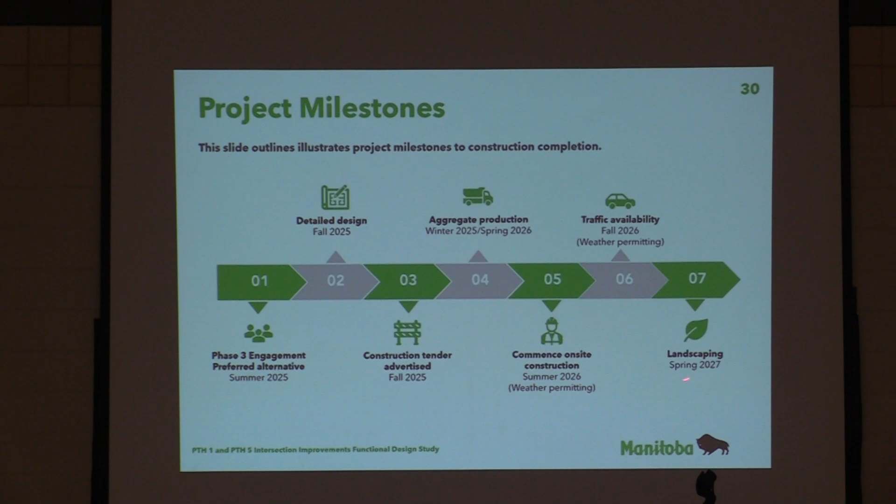Okay, so those are the key questions. I've given this theme throughout our presentation, which is: does the evaluation process make sense to you? We want it to be logical, transparent, thorough. So we're open to critiques about how that evaluation has been done.

Do you think they need to do this? We can add in those interventions. Would you add anything? What impacts or benefits do you see from your own perspective?

Everyone wears at least a couple hats. You might be an emergency services provider - what's your perspective from being an emergency services provider? But you're also a citizen, so you can answer as both. It's helpful to know which one you're answering from. If you're a potato truck driver versus someone driving to school, those are two different perspectives too. So it's really helpful for us to know what perspective you're coming from.

And if you do have a preference, it's really helpful to know why. Because we're not going to have a vote on it - that's not how major infrastructure decisions are made. So tell us why, and that would be enormously helpful.

Some good insight already shared, and we're taking notes to make sure we don't miss that. Is that it here then?

Okay, so now there's a survey. You all have comment sheets. You waited to fill it out to have information, but you filled it out early - before you add more, that's okay. Just make sure you add if something changes your thought pattern.

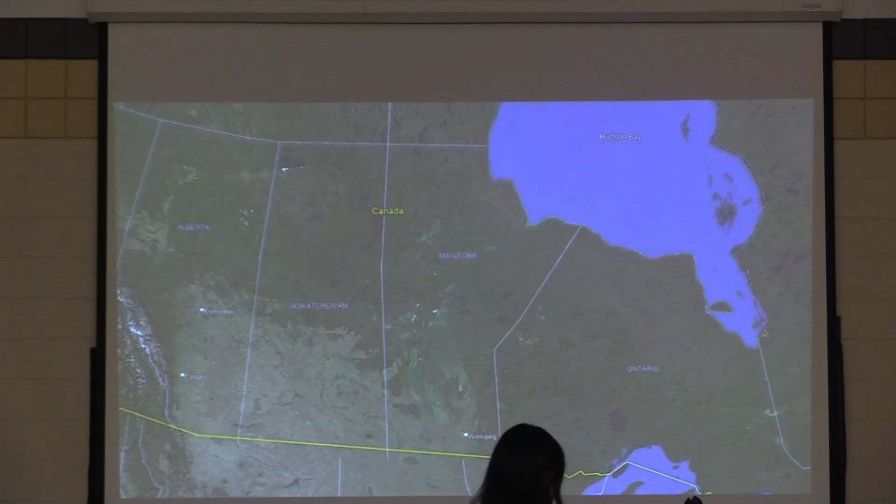Manitoba Transportation and Infrastructure is undertaking a design study to improve safety at the intersection of Highway 1, the Trans-Canada Highway, and Highway 5, north of Carberry. Currently at this intersection, Highway 1 features free flow conditions, and Highway 5 is controlled with stop signs approaching Highway 1. Between the eastbound and westbound lanes of Highway 1, there is a narrow median controlled by a yield sign. As part of the design study, intersection upgrade options have been developed, including a widened median intersection, a split intersection, and a reduced conflict U-turn, or RCUT for short.

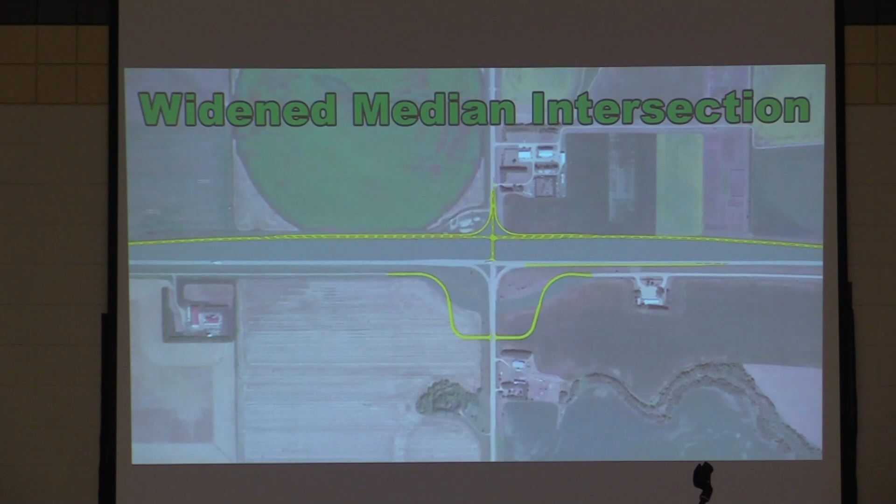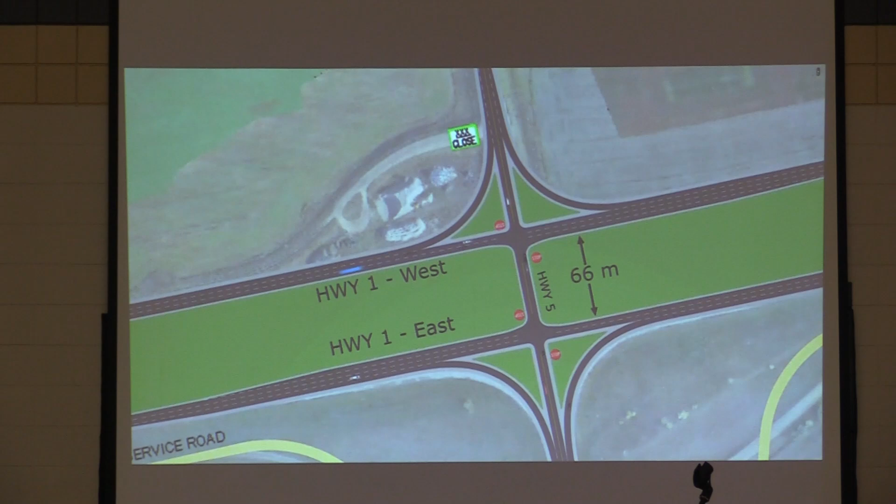The widened median option, as the name implies, includes a wider median than exists now between the eastbound and westbound lanes of Highway 1. To accomplish this, the westbound lanes would be reconstructed to the north of the existing westbound lanes. Safety improvements of this option include replacing the yield signs in the median with stop signs and accommodation of traffic in the median. This median separation allows the driver to break the crossing into two stages, giving drivers more time to look and select gaps in the Highway 1 traffic.

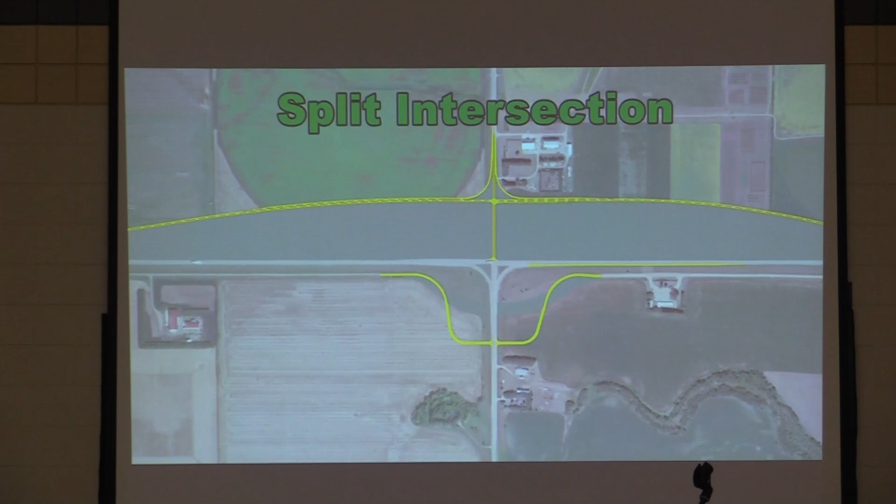The split intersection is similar to the widened median option, except that the median is more than twice as wide. This option would require the westbound lanes of Highway 1 to be realigned even further north than in the widened median option.

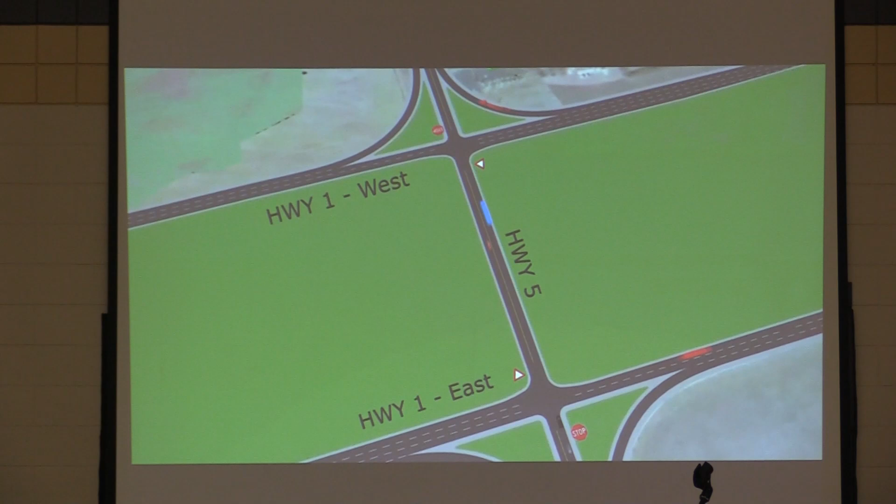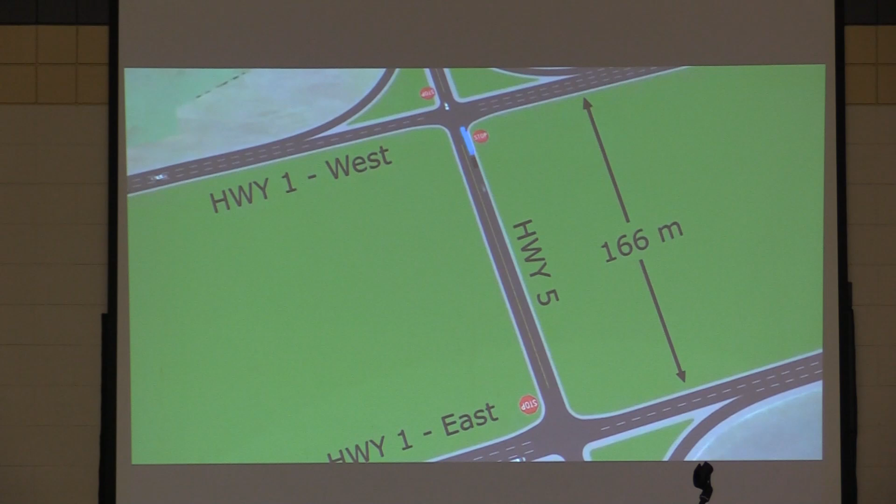This option improves safety by also replacing the yield signs in the median with stop signs and providing even greater accommodation of traffic in the median. This option also allows for staged crossings, providing drivers time to look and select gaps in the Highway 1 traffic.

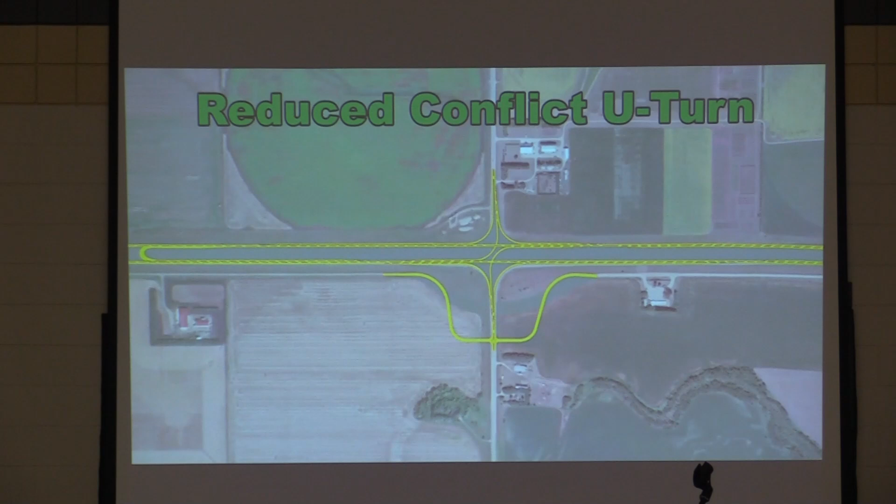A reduced conflict U-turn, or RCUT for short, is an innovative intersection design that improves safety and operations by changing how Highway 5 traffic crosses or turns left at Highway 1. The widened median option and the split intersection option are more common in Manitoba. However, since the RCUT option would be new to Manitoba, it requires some further explanation.

On the major road, in this case Highway 1, drivers navigate the intersection like a conventional intersection, traveling unimpeded when staying on Highway 1. Drivers are permitted to turn either north or south from Highway 1 onto Highway 5. The new median left turn lanes provide better views of oncoming traffic to help drivers cross the oncoming travel lanes more safely. On the minor road, in this case Highway 5, vehicles are not permitted to directly cross Highway 1 or turn left. All traffic on Highway 5 approaching Highway 1 starts by turning right to merge onto Highway 1.

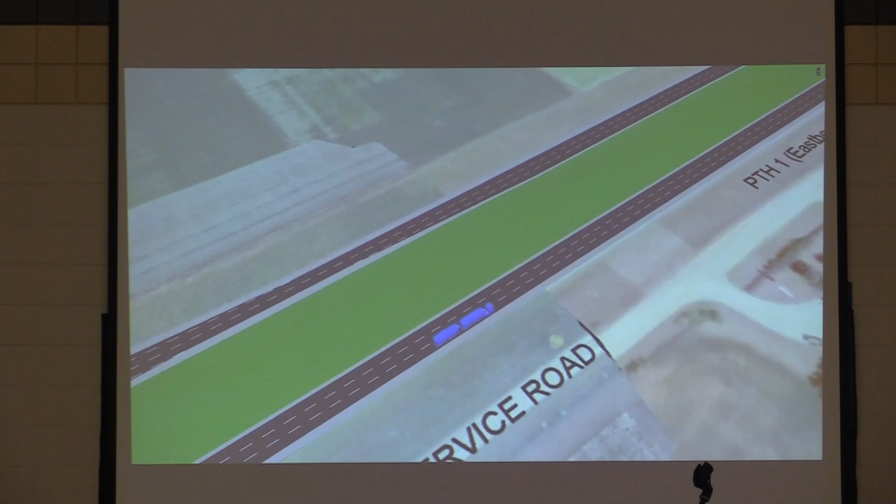Traffic then continues on Highway 1, changes lanes, and will need to make a U-turn on Highway 1. Then traffic either continues down Highway 1 or exits onto Highway 5, depending on their destination.

The RCUT intersection is very common in the United States and is emerging in Canada as a safe option for major highway intersections. The most recent installation of an RCUT is northwest of Saskatoon on Highway 16. This intersection, while new to the area, is being used successfully. Following construction, video conflict analysis shows that it has significantly reduced high-risk vehicle conflicts. This is expected to reduce fatal and serious injury collisions over time.

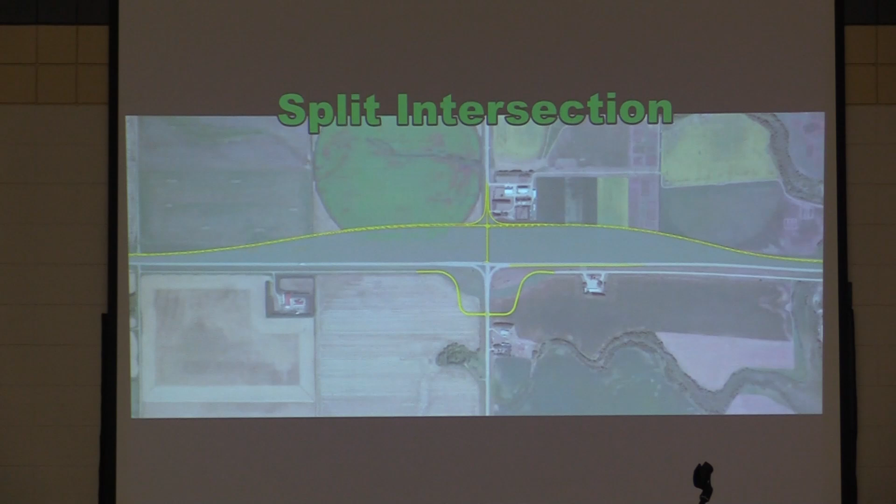MTI has developed options to improve safety at Highway 1 and Highway 5. All 3 options will improve the safety of the intersection, although the safety performance is not the same for each option. A thorough comparison of the advantages and disadvantages of each option has been undertaken and is available for viewing. Public, stakeholder, and rights holder feedback can help the study team make better recommendations by identifying specific local issues, topics, or concerns for the study team to look at.

For further information on this project and to provide feedback, please visit these websites. Thank you for watching.

Okay, thank you for watching. Thank you for listening. Thank you for your questions and your comments, and we'll just keep going.